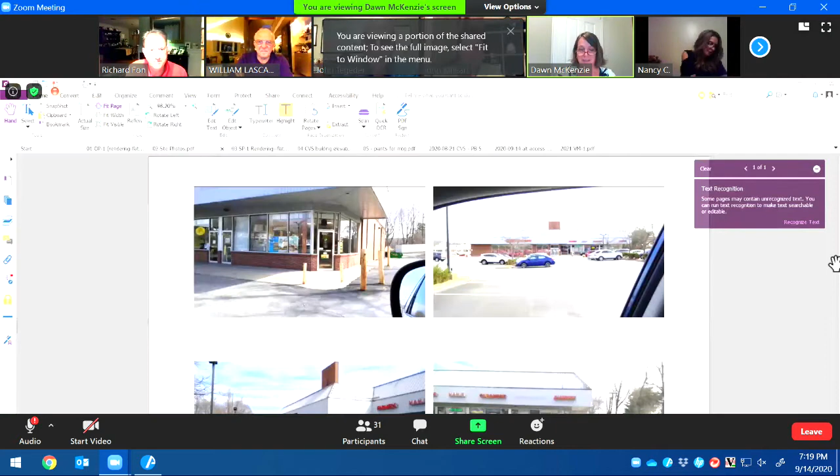CVS Plaza is in the C3 zone, it's 3 acres, located at 1990 Commerce Street. Commerce Street runs along the west side here, and this is the Triangle Plaza over here. The planning offices, the town building, is right next door in this spot.

We were here a couple of years ago with the PCSB Bank project, and we're back again. Vera Management, the owner, is looking to provide curbed plant beds along the front of the CVS building and the retail building on the east end of the plaza. This project has important benefits: it provides plantings where there are none now, and curbed islands with decorative bollards, which provide a much needed safety improvement along the front of the building.

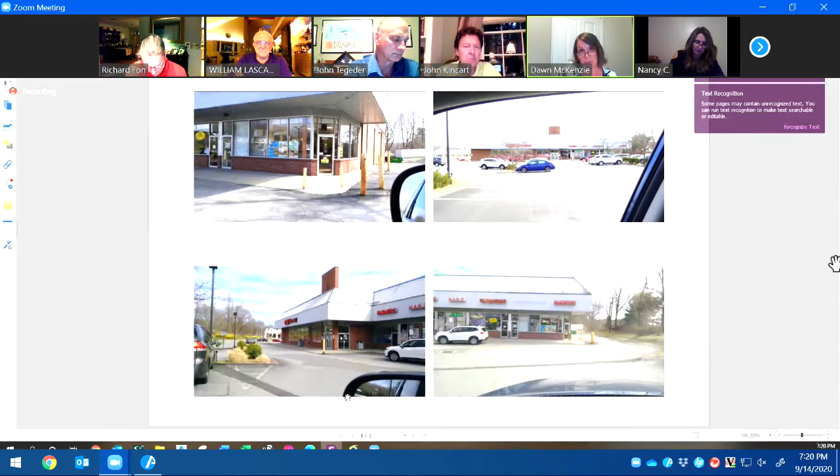Looking at the photos, this is the existing condition of the front of those buildings. Right now we have the parking lot, road pavement, and the sidewalk, with no curb in between, and it's that way along the front of the building. So they're looking to put something in to provide safety benefits.

Chuck DeMilo is here from Vera Management, the owner. He'll give you a little history of the project for those who aren't familiar with why we're doing this. Chuck?

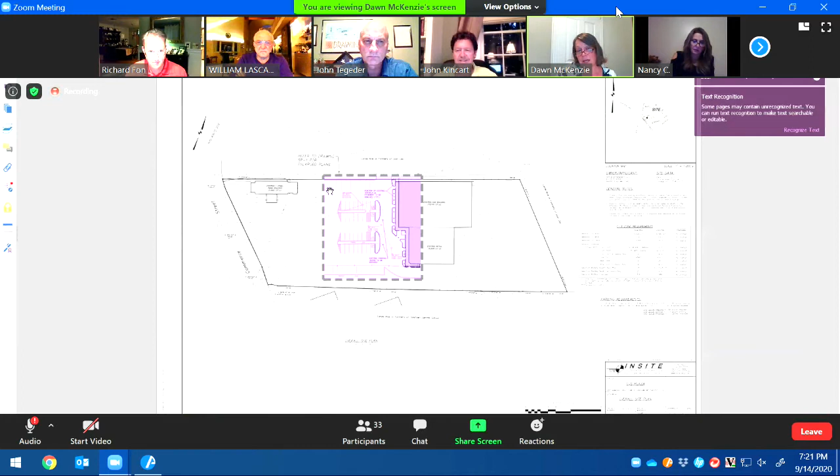In the past, there have been cars driving down. Let's go back to the overall plan. Typically the way circulation works is they'll come in off of Commerce Street, turn this way through the parking lot, make a right turn toward the building, then cut over to Triangle Plaza. That's how it works in both directions.

There have been vehicles that have come down the aisle and actually driven into the building. Inside, the CVS staff at the cash registers are standing with their backs to this wall. When Vera Management took back control of management of the property during the PCSB project, this was one of the things they were asked about, if something could be done. So that's the main reason we're doing this project.

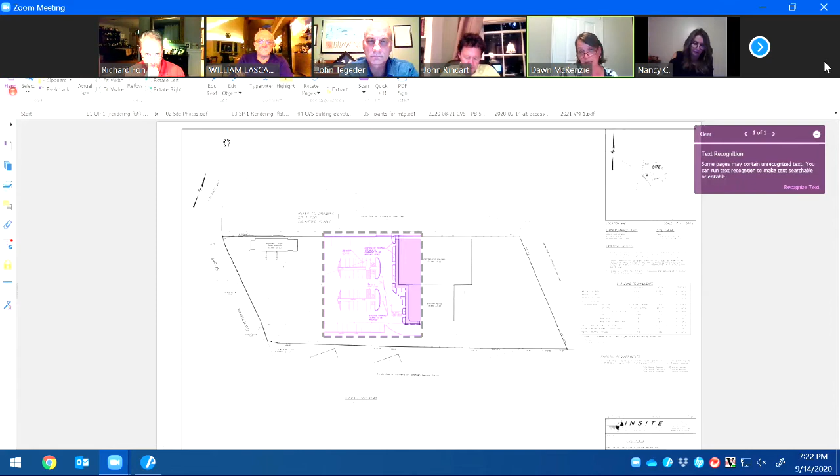In addition, they're planning on restriping and paving the parking lot as well, with the intention of getting that done this fall. So let's take a closer look at the project.

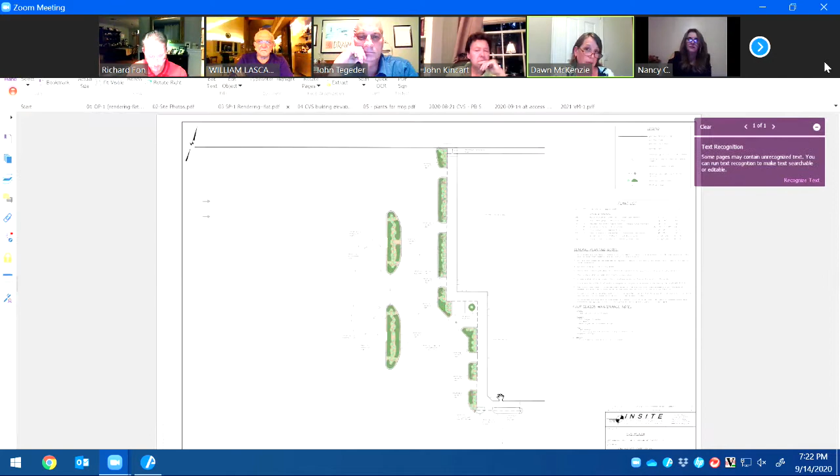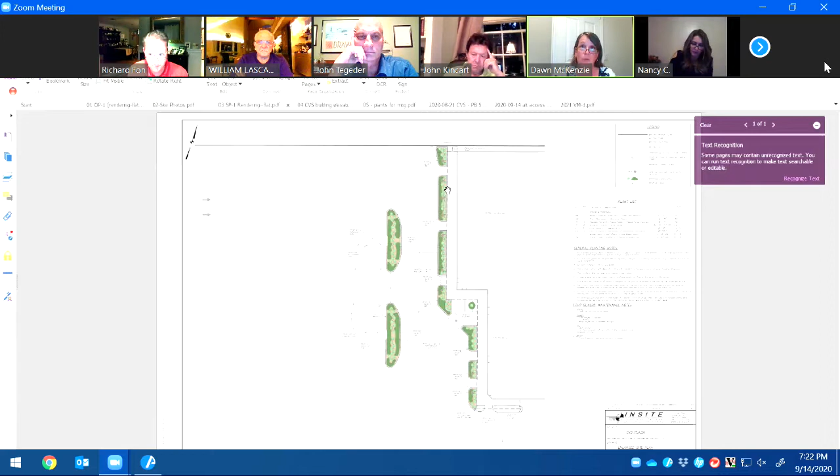Here we are at the east end of the plaza, the CVS and retail shop buildings. Our intention is to remove some of the concrete and asphalt pavement along the front of the building and put in curbed plant beds, with decorative bollards mixed in to provide additional protection.

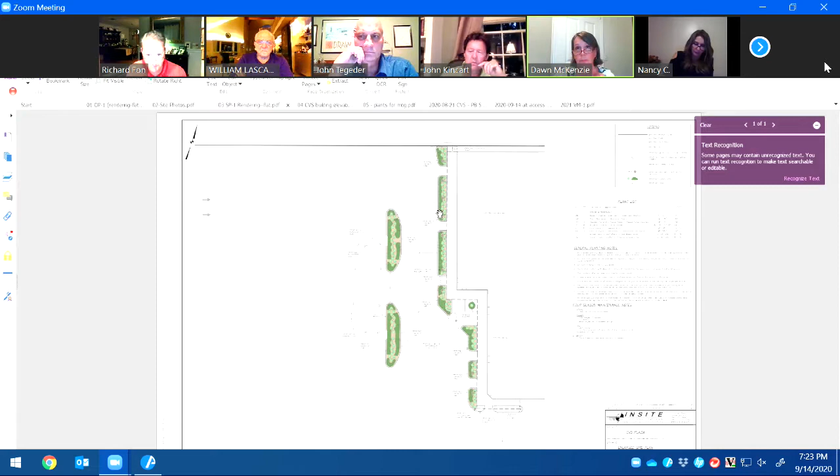Because we're taking pavement out in this location, we're also shifting the drive aisle over and making the islands at the ends of the beds larger, expanding and increasing them.

In the existing condition, if we flip back to this plan and zoom in a bit, you can see the dashed lines underneath in the purple area showing that right now there's just a half an island. We're shifting it over, making it bigger, and expanding it on the other side -- an additional traffic improvement for visitors in the plaza.

For this submission, at the request of the planning board, we provided some elevations of what the plant beds are going to look like in front of the building.

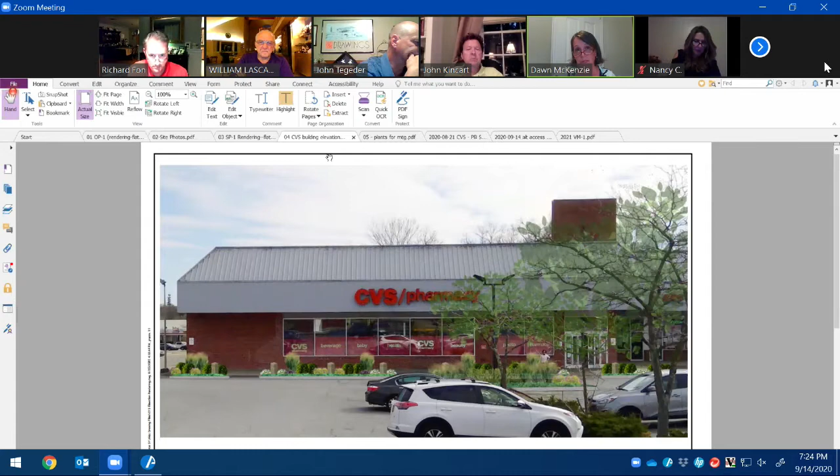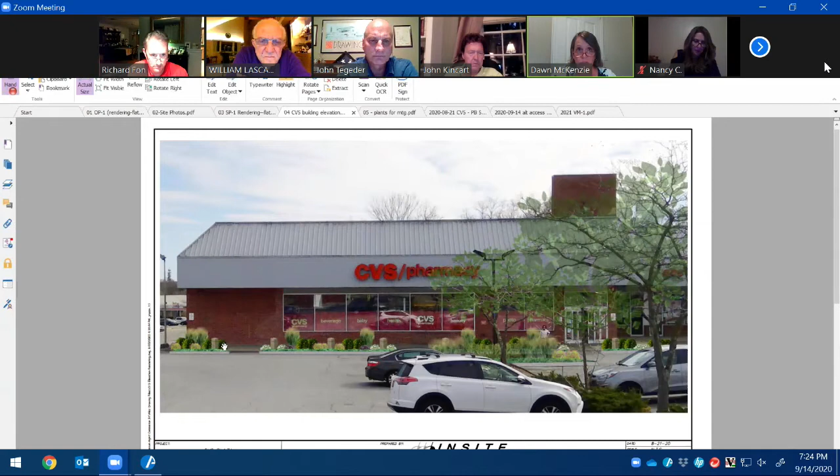You can see it's a 6-inch concrete curbed island along here. There are access pathways to the existing sidewalk under the roof overhang in front of the building. And we're providing, in addition to that, plantings and decorative concrete bollards in selected locations along the front of the building where we thought they would provide the most benefit.

The planting beds have been placed at the ends of the drive aisles because we thought that would be the location where they provide the most benefit, and the bollards are concentrated at the ends of the drive aisles as well. This is just in front of the CVS.

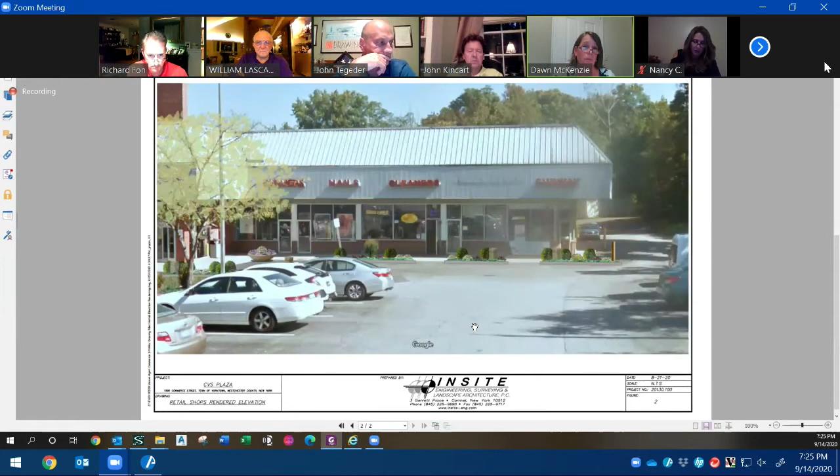We have another rendering, let's take a look at that. This is the other building. So there's islands and stone bollards along there as well, with plantings provided in front of the shops.

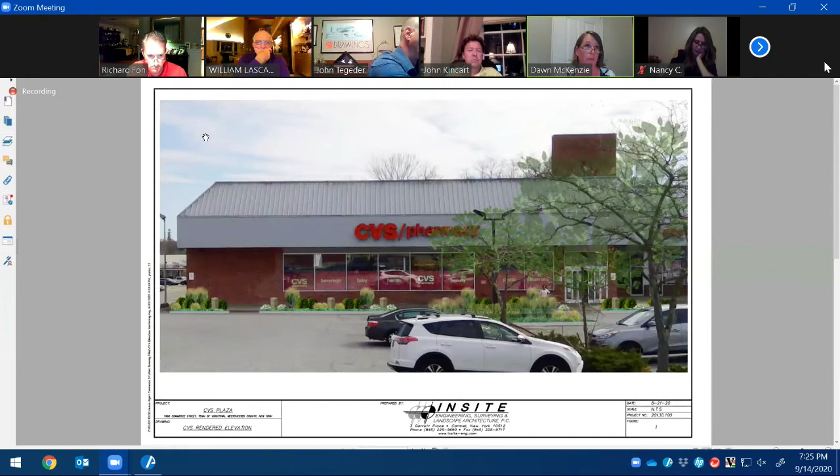When we met with the planning board at the last meeting, just to give you an idea of what we've been up to since we met with the board back on, I believe it was August 10th, the board had asked us to respace the bollards to get them closer together and to provide dimensions so they could see how far apart the bollards were placed. So what we've done, if we zoom in...

The board had asked us to space them at 6 feet on center. If we did that, that would require us to install twice as many bollards, and really that was an aesthetic that the owner was not looking to provide.

One of the first layouts that he had gotten for this project was a soldiered row of bollards along the front of the building, and it really was not very attractive. We're trying to do something that will provide benefit, safety improvements, and something that was aesthetic and actually looked better than what's there now.

And of course the plantings accomplished looking better, and the bollards we've selected for the project actually look much better than what's there now. But we feel that the improvements we're providing really provide much more safety benefit than what's there now, between the curbs, the plantings, and the bollards.

So what we've done is we've spaced the bollards closer together. We have focused them on the ends of the drive aisles, in these locations, with the spacing that we've provided. So center to center, which doesn't mean a lot, the bollards are 13 feet apart.

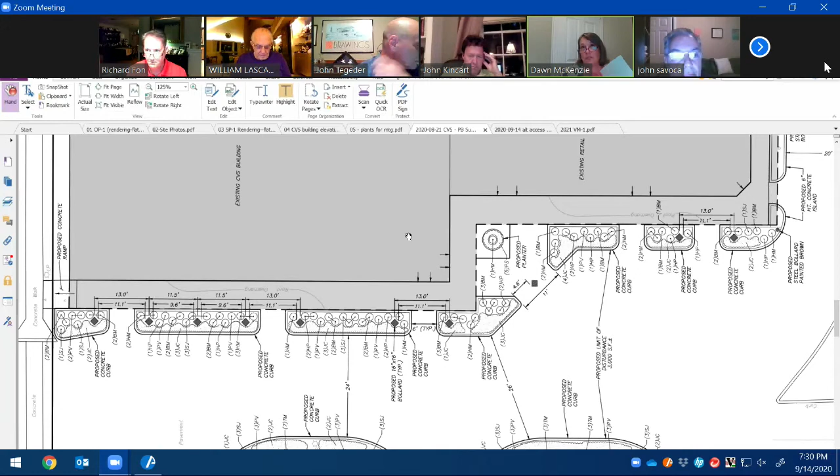Let me just bring that up. It's the sketch right here. So this is the location right here. The entrance to CVS is here, and there are some windows here. And then between these windows and the next set of windows, there's the fire department connection on the front of the building. So what we are suggesting is we'll shift one of the access aisles.

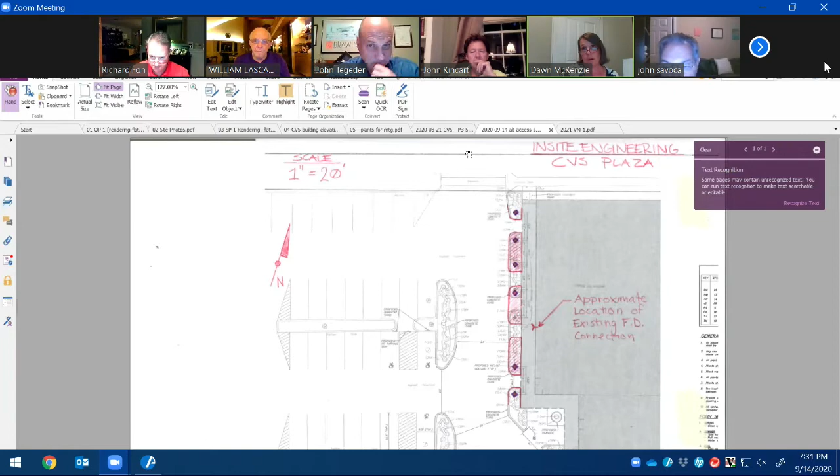Actually, it would end up providing an additional access aisle in that location and just modify the beds slightly. So we end up with the bollards in the same locations as proposed on the plan we previously submitted, but it would provide the requested direct access to the fire connection for the fire department.

He also recommends striping for a fire lane, which I'm sure was there previously, and we can do that. We just need to verify with him the width, and I wasn't able to speak with him today regarding that. The other thing he recommended was fire lane no-parking signs within the plant beds, and we can do that. We'll just need to verify the spacing and get those on the plan.

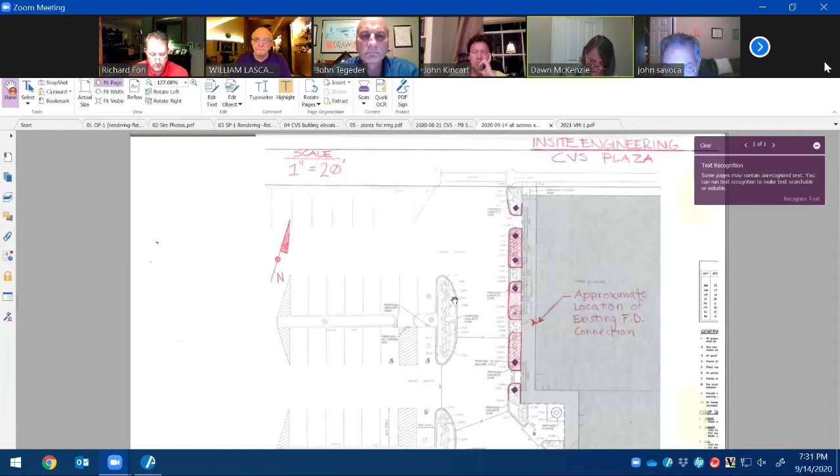And I think that goes through all of the things we've done, and I think it gives a general overview of the project.

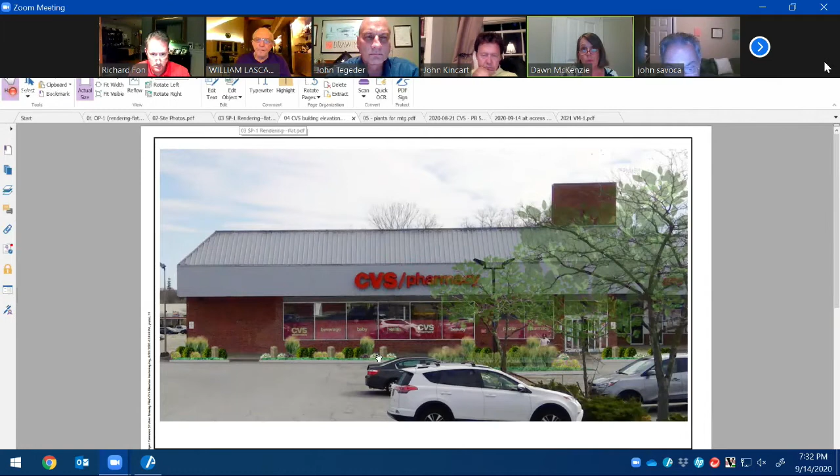One question on the town engineer's comments - there was a question about the handicap spots. Yes, we can. So if you look at the plan, we can provide another handicap space right here. It just requires markings and additional signage. We already have an access aisle, so we'll address that as well.

Okay, and this isn't impacting the parking requirements, right? No, it's not. We're only required to have 88 parking spaces, and we have 107, so we have more than enough parking to accommodate another handicap space.

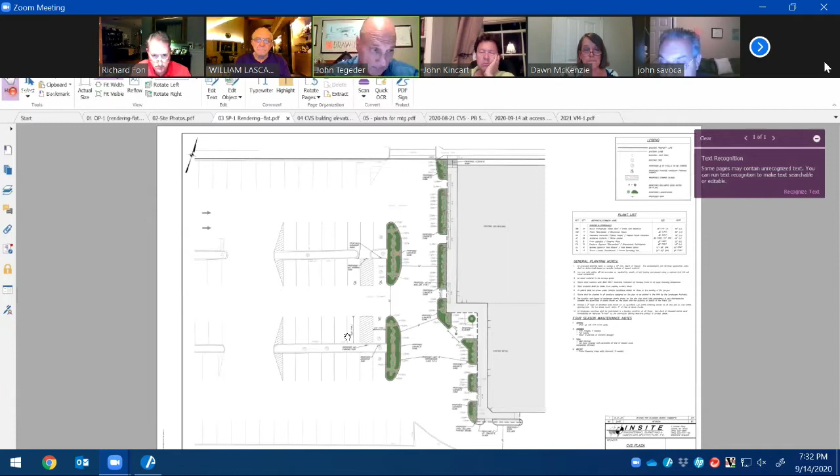But Dawn, could you go over the parking in a little more detail? You're eliminating 4 spaces, is that right? We are - so let's see, let's go back to this plan. Actually, that's an old version. We're not eliminating parking spaces.

Most of the spaces are larger than required by code, so we're actually able to restripe with code-conformant spaces, because what's there is bigger than needed, and not lose any spaces. So what you're saying is that this plan shows you're eliminating 4 spaces, but by virtue of the restriping, you're actually providing 1 more than exists at the site today - is that correct?

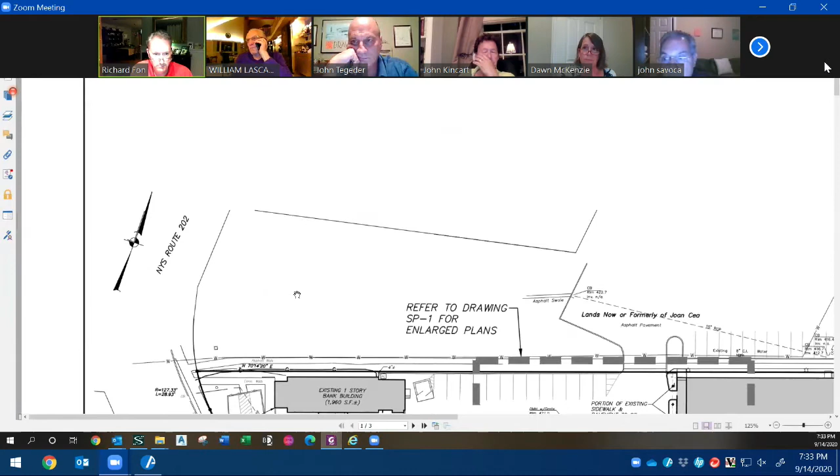Let's just go - sorry, this highlighted plan is an older version, and we confirmed the parking counts, which I have here. So yes, we're actually picking up a space. That sounds odd, but that's what I'm being told.

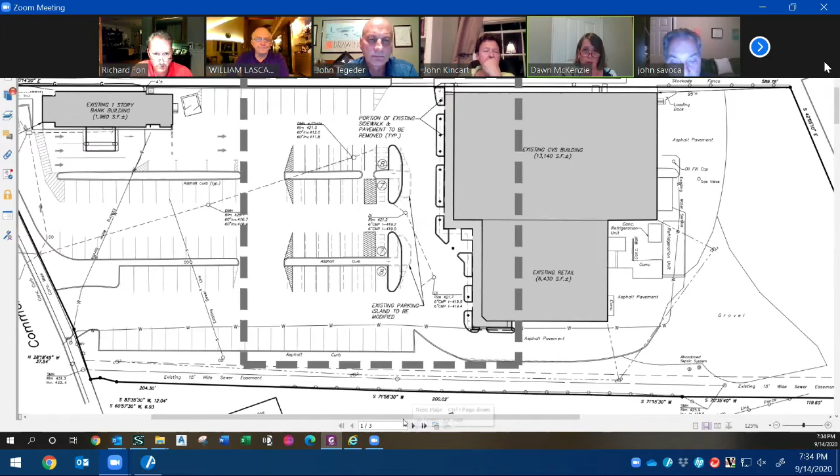Just out of curiosity, what are you going to in your space size in that area? They didn't dimension those - let's see if it's on the other plan, hold on. 8.5 by 18.5. Got it, okay, thank you.

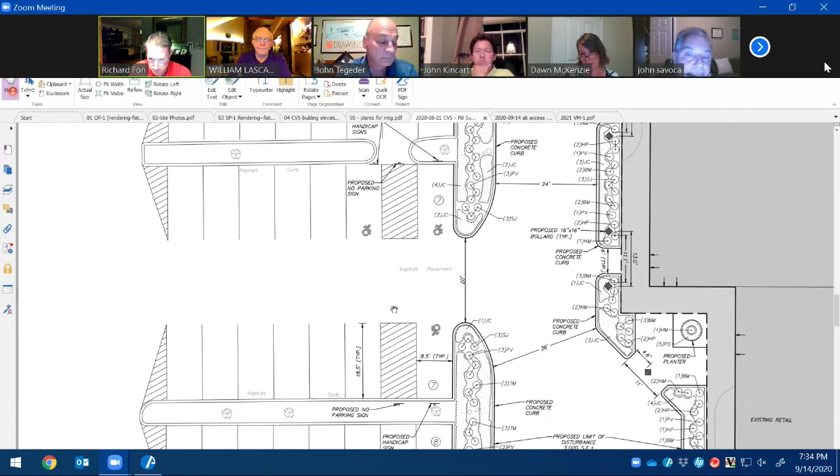Okay, that's it, Dawn? Yes. Any members of the board have any issues? Well, I'm going to reiterate what Bill said last time - I think the spacing of the bollards is something that needs to be taken into consideration.

I understand that the proposed plan is far superior to the existing site conditions. I was there for one of the incidents with CVS, and it was horrible. They came down the traffic aisle through the building, and it was quite an event. Thankfully, nobody got seriously hurt, to my knowledge anyway.

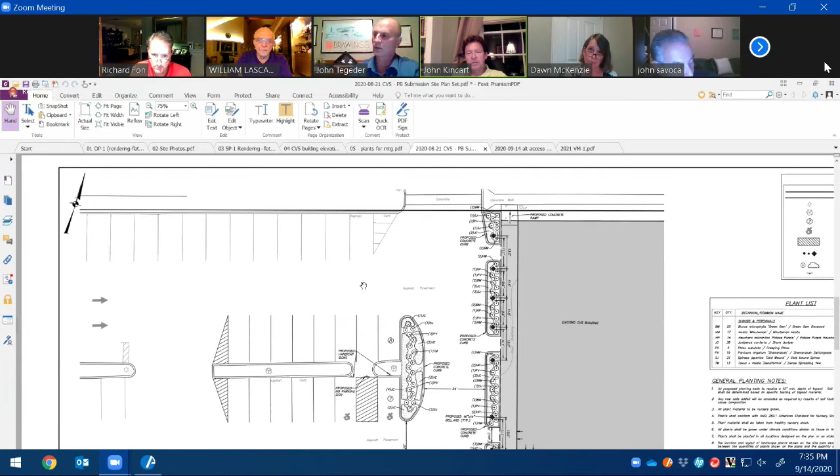I see the building, and the north end is where the vehicle came down the hill behind the now PCSB building. That's fairly heavily fortified, which is great. We're not just talking about traffic patterns, and that's the point I'm making - if people can come down the hill and hit the building because of the very busy intersection, perhaps the busiest one in town, then that end of the building should be protected, and it appears to be fairly well protected. I'd like to see another bollard.

The fire inspector's comment is going to throw a wrench in that, but that long space along the front of the building that was quite a bit larger, as people try to maneuver that turn, they could easily get a car in between those bollards. But the biggest concern might possibly be the southeastern section of the building where Subway is and some of the other tenants there—it's relatively unprotected. Somebody coming in down that traffic aisle and trying to maneuver a turn to the left, if somehow they lose control of the car, that whole corner only has a single bollard right in front of the corner. There's a lot of space for a vehicle to get through there.

I would like it to be revisited. If you're going to do it, I think you should do it right. Even if it's putting a railing in between the bollards to create a fence-like look that we've often seen, it could be an iron rail in between the concrete. It could be iron or some type of steel in between steel bollards, but something that would be a little more protection than what's being proposed.

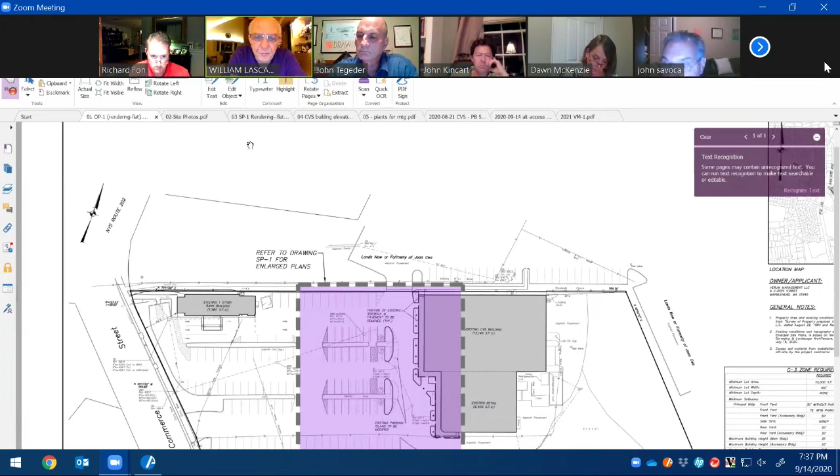Well, I absolutely agree. A juniper is not going to stop a car. You can get a Sherman tank through those bollards. And that's where it'll go unless you have a target on the bollard and they want to hit the target—that's a different story.

Yeah, but look at the angle—the bollards are protecting the ends of the traveled portions of that parking lot. And this corner is really not head-on to any other section except the road that's right in front of it. I think that's a vast improvement over what used to be there, which I think is nothing.

The corner itself is kind of protected, but I think that was basically done originally for the truck traffic that has to get behind the building and maneuver that turn possibly. But somewhere in there, I think it might be a good idea. I don't want to offend anybody's creative plan here, but safety-wise, if it could be revisited, I would, on behalf of the public, appreciate taking another look at it. I commend the applicant for taking control of this situation.

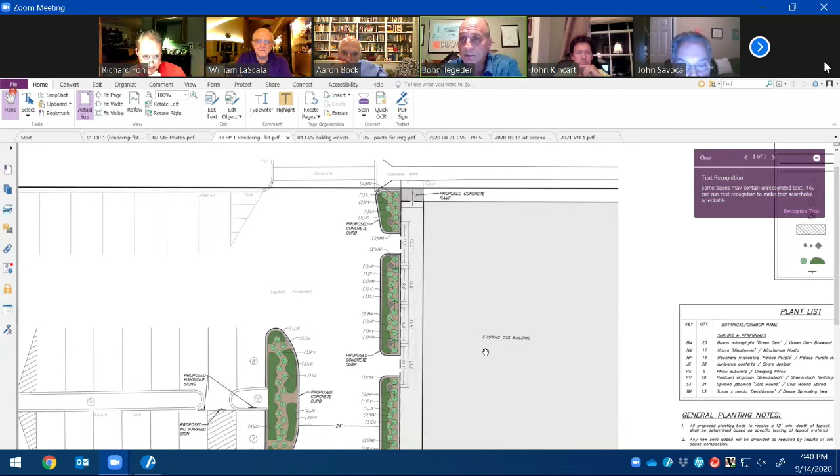So when I looked at the renderings, I think they're very attractive, and I actually think that the bollards mixed in with the plantings there—if there were another 2 in that section where the 3 are, I don't see any aesthetic or any diminishment in the aesthetics that you're creating whatsoever. They are decorative bollards, as I understand it. I haven't seen the detail or the catalog cut on them, but I wouldn't see any aesthetic difference. And if you added 2 or 1 or 2 even on the south side, I think you would increase the safety to a very much higher degree, actually. So, absolutely, that's my sense.

Of course. Dawn, can you go back to the plan view, please?

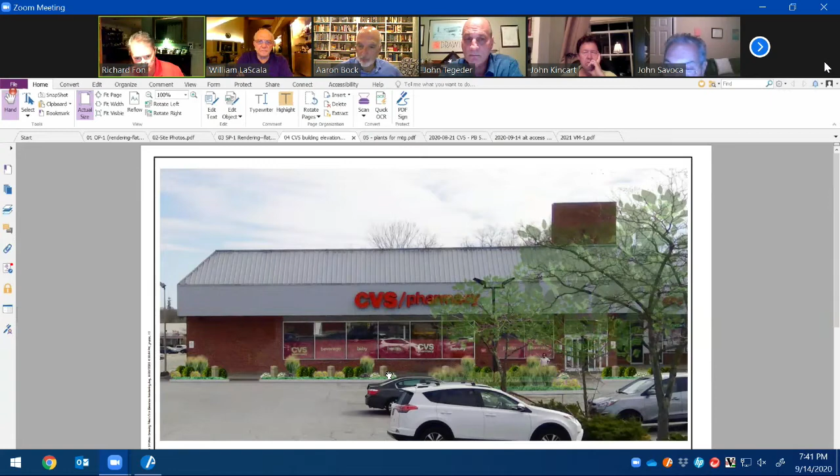This one, or the site plan. Yeah, that's fine there. I mean, if the whole lot's getting restriped and we're redoing the whole area, would it be beneficial at all to have that center aisle there—

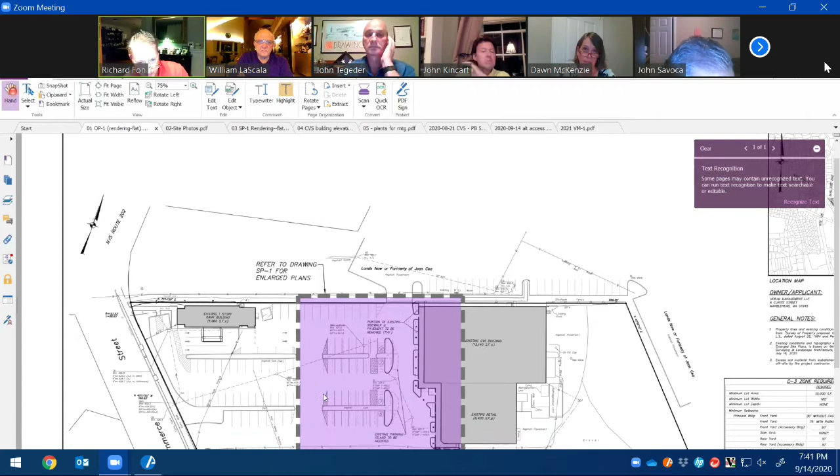angled parking so that it's one way, traveling away from the building, so that people aren't going to drive towards the building, at least with that center aisle.

That might give... and I agree with John Kincart. I'd rather see the larger spots, especially if you have enough parking.

But what about, is there any way to use... if the owner doesn't want to see bollards, maybe you could get boulders and anchor them somehow so they'd become protection. I don't know how you'd engineer that, but I do agree with John Kincart and his comments.

There's a problem there, and we appreciate everything you're doing trying to make it better, but is it enough? Any other thoughts from the board?

Just one other thing I have—I know I touched on it last time, but I don't think you're doing, Dawn, you may have to refresh my memory. I apologize—you're not having a curb at the individual entrances to the sidewalk?

So you're talking about... let me get my mouse. You're talking about these locations? Correct, so no curb there, right? So you're maintaining the existing concrete sidewalk as is?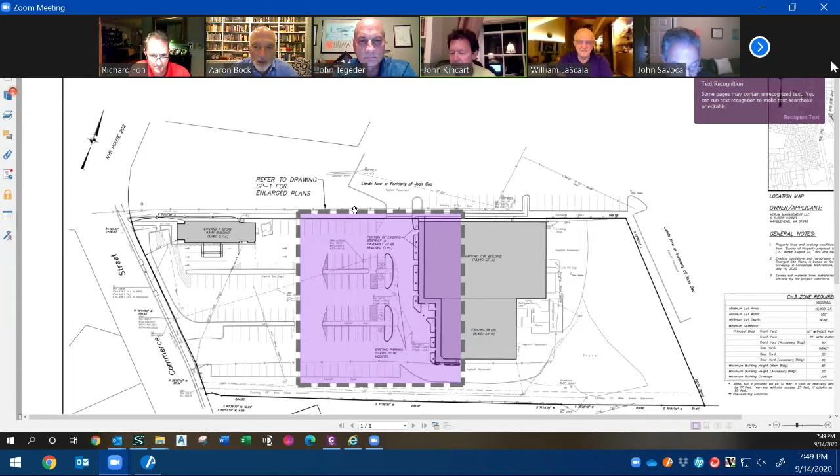If the applicant would consider what we've suggested in terms of additional bollards and maybe keeping the spacing of those, the dimensions of those parking spaces on the wider side at the very least to afford a tiny bit more maneuverability but visibility, I think the board, from a couple of comments that were made, would appreciate efforts in that regard. I don't see the dimensions of the parking spaces holding anything up.

And because we didn't get any public comment, I would recommend that the board close the public hearing and leave it open for written comment for the usual 10-day or 14-day period. If something comes up, we can revisit it at another meeting, but at least because we're only having one meeting this month and we are heading into fall, we'll be in the fall season calendar-wise by the time we meet again. I would like to see the process move along because it is going to be a benefit safety-wise to the public. Yeah, I would agree with that.

I second. John, before we move on, can we work some of these other issues out, stormwater and such, in work session? Well, I guess I would ask John, what are you proposing, that you close the public hearing, leave it open, and then come back to the next meeting and do your decision statement? Is that your sense? That would be my recommendation. Okay.

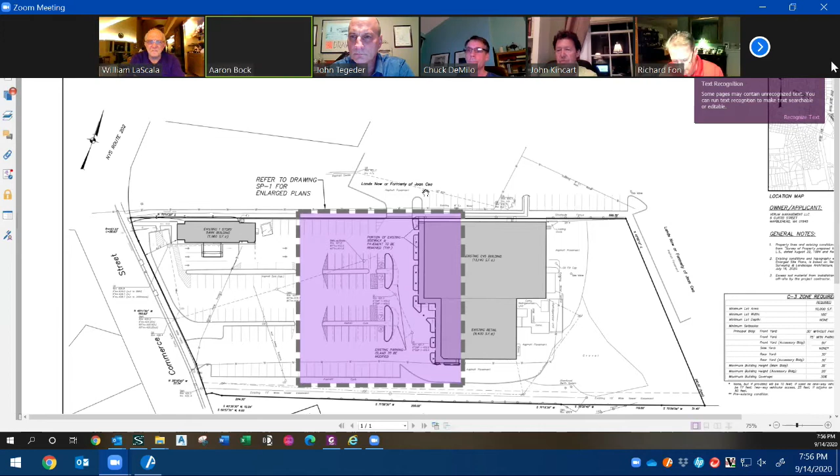Mr. DeMilo, would that be helpful to get a conditional approval sooner than later so you could start that work? At least we know the location of the curbed planting beds. I don't think anybody brought up any comment about relocating or changing the dimensions of those curbed areas, to my knowledge. Well, that helps.

If the program is delayed for a month, we probably are going to miss the window for this fall. If we don't move forward soon, I'm pretty sure this is going to need to be delayed until spring. Yeah, they need to be reconfigured according to the fire lane, so they'll need to be drawn differently and redimensioned.

So, okay, but again, that can be a condition. I think that's fine. John Tegeder, do you have a concern about issuing a neg deck and a site plan approval with the SWEP issues still outstanding?

No, I don't. The reason is because this is a previously developed site with a stormwater regime already in place, which is being altered in a way that is not expanding the impervious surface. It's actually lessening it. So I think the stormwater regime here will still work properly. Otherwise, I think the commentary from the town engineers would have been much more substantial. I still want to find out from him, but I don't think that even if there are some modifications it rises to the level of needing a positive declaration on this project.

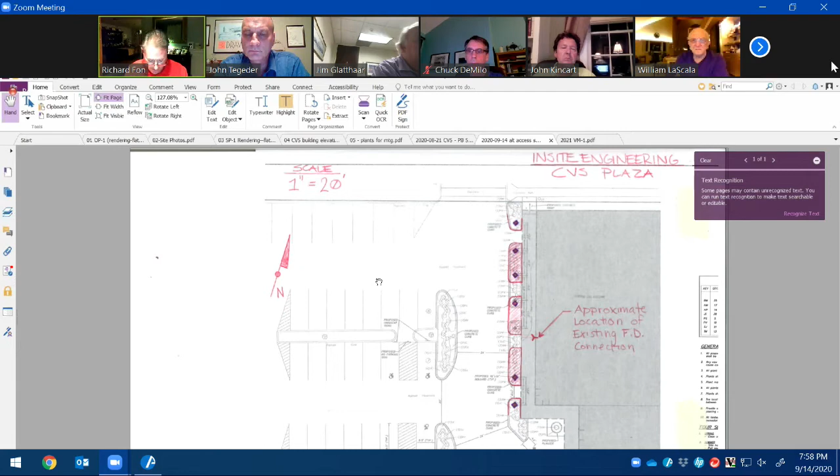So between now and the next meeting, Dawn, I think it's important that you meet with John, the town engineer, and possibly the fire inspector at the same time so that we can get that moving. It sounds like the consensus of the board now is this is a safety improvement. They're not gaining anything out of this other than the safety of the occupants and the people there, which I think is important. John Kincart brought up a good point that before we know it, winter will be upon us.

So we do have a neg deck in front of us, and we also have, let's pull it up, a resolution.

So first we'll deal with the neg deck, dated September 14th, 2020. Do I have a motion to approve the neg deck? So moved. Second. You didn't declare lead agency.

Do I have a motion to declare the town as lead agency? So moved. Second. All those in favor? Aye. All right, then we have the neg deck again, dated September 14th, 2020.

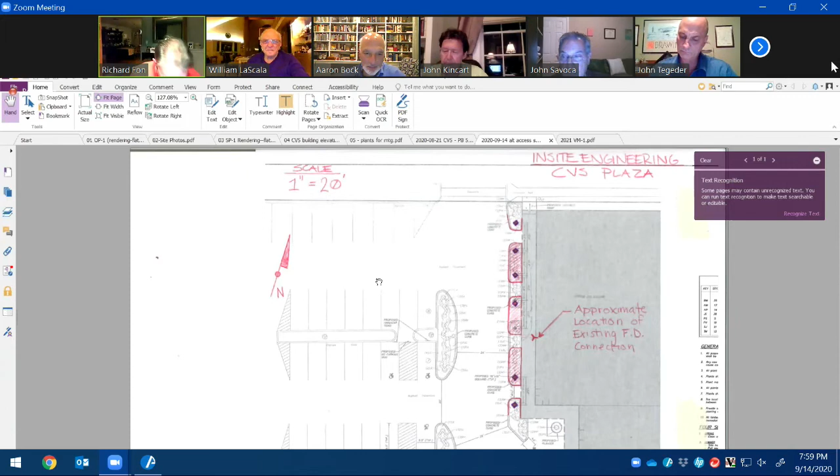Do I have a motion? Motion. Second. All those in favor? Aye. All right, then we have a resolution approving the amended parking plan for the CVS Plaza.

The notes to be included have to do with correction of the lighting, the fire inspector's issues with the fire lane, the location and design of the bollards, the parking spot alignment and size, DEP clearance, and the possible stormwater permits.

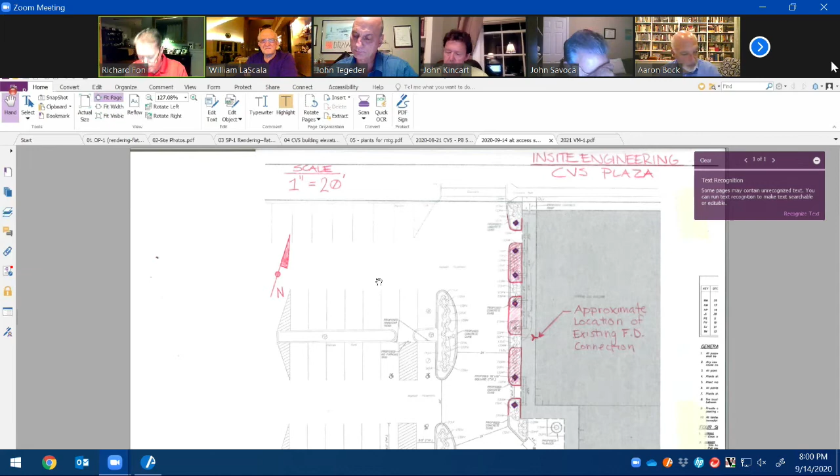Other than those noted, are we missing any, John? Landscape and bollards on there, the planting specifications. Okay, as per box, so the landscape plan. Jim, we missing anything? Nothing that I can think of.

All right, so with the comments noted, do I have a motion for the proposed resolution? Move. So moved. Second. All in favor? Aye. Aye.

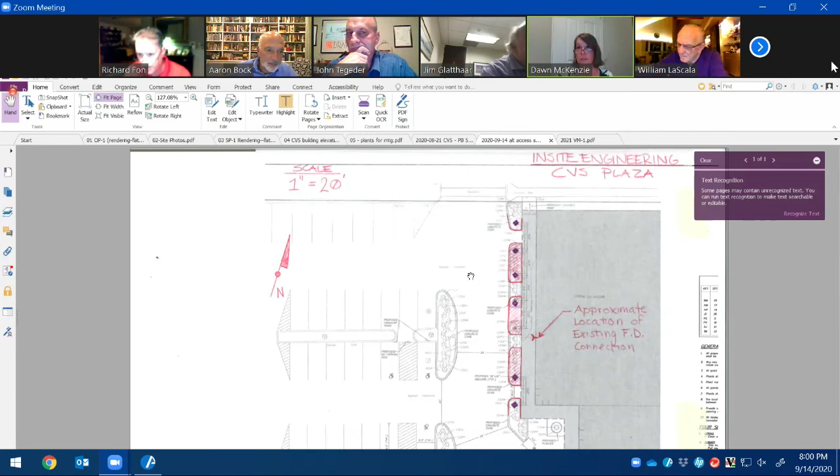Thank you. Thank you very much. Well, Mr. DeMilo, thank you for working with us and improving your place. Yeah, thank you. Thank you for your time. Thank you for your consideration. Great, thank you for working with the town. Good luck, Dawn. Thank you. Thank you very much. Don't worry, we'll get it done. Great.

Okay, is Joe on? Can you hear me? No, we can hear you, but it's got to be louder. Oh, I heard him. Yeah, I heard him say can you hear me. Can you hear me? I heard him too. Yeah, we can hear you. Okay, I'm going to step out.

All right, John. I'm recusing myself on this application. Good luck. All right, just for the public, we are back with number 5, the Sandvoss Minor Subdivision. This is a decision statement, located at 1005 Hanover Street.

Joe, you're on. Hello, everyone, nice to see everyone. So we're before you asking for a resolution of approval for the Sandvoss subdivision, which is a 3-lot subdivision. It involves 4 lots because one of the existing lots will have an access easement for the 3 lots to the rear of the property. So really it's a 3-lot subdivision and it's a minor subdivision.

This project has gone through extensive scrutiny. It's had 2 public hearings. It has approval from the DEP, the DEC, the Army Corps. The town engineer has given his conditional approval, and the health department approval also. We are asking to move this forward and get a resolution of approval so we can get the map filed and this project underway.

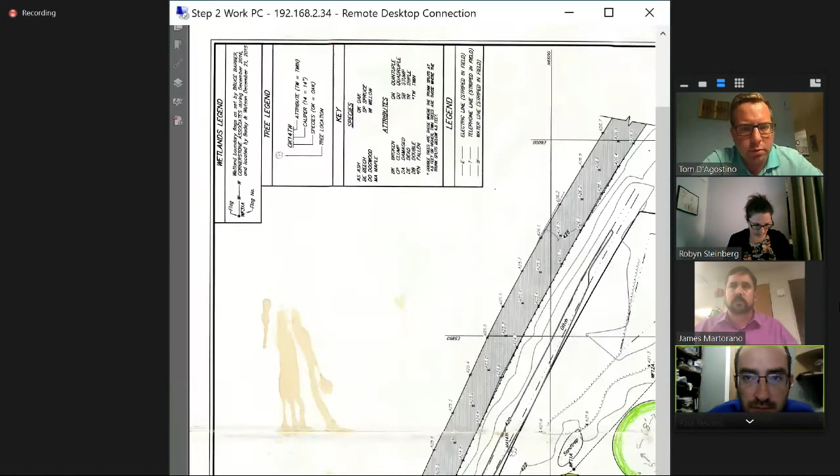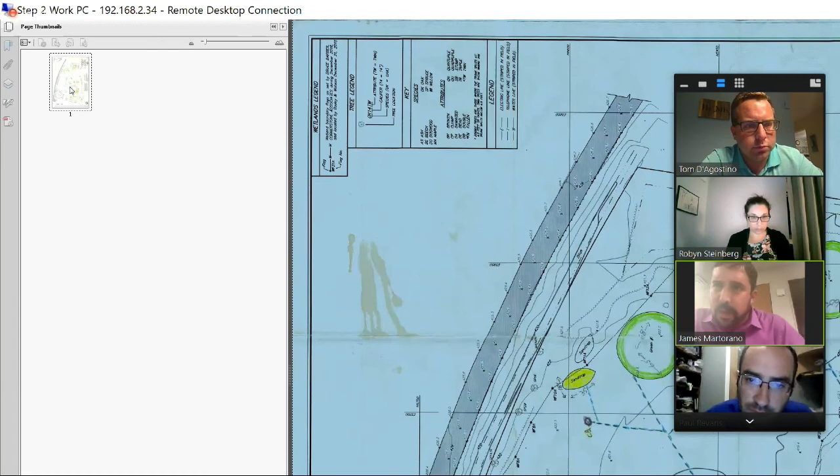That's very interesting. So in green are the greens, and red, I believe, are the tee boxes. And I believe there's appropriate drainage, which was added to the SWIP on those greens as well.

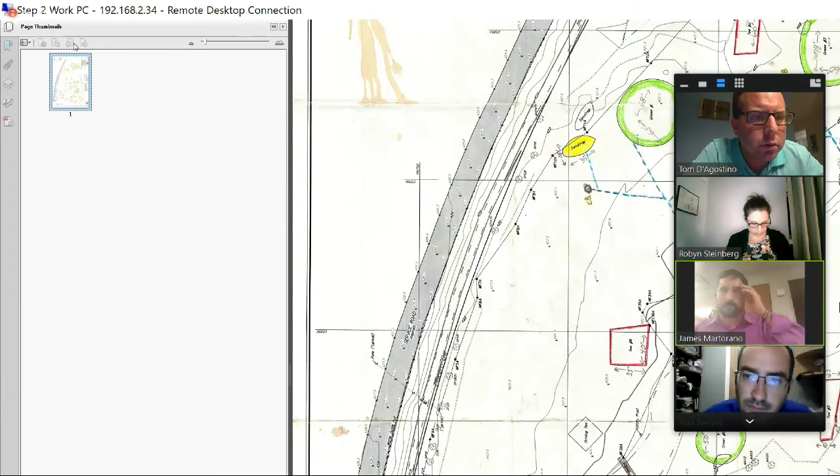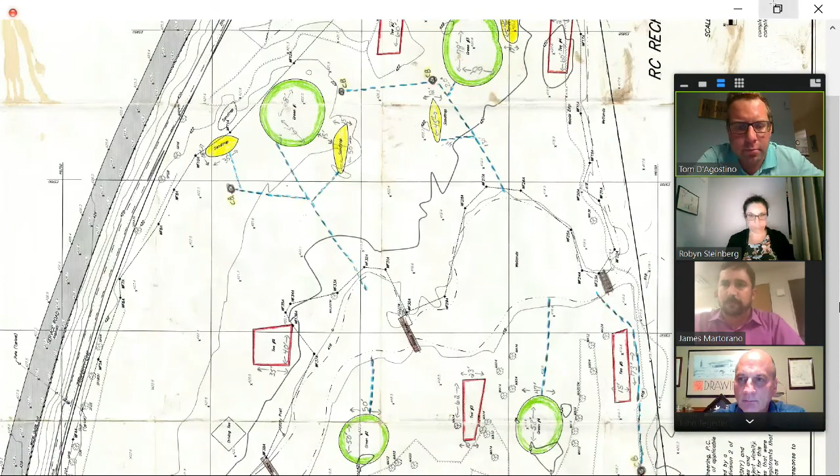That's what you're working on now, the greens and the tees. Is that right? Yes, the 2 tee, the 3 green, the 4 tee, and the 9 green.

Okay, and the entire project also has some work to the fairways, is that right? In terms of some tree removal, is that correct? That is correct. There's a number of dead trees along the way there that could be hazardous.

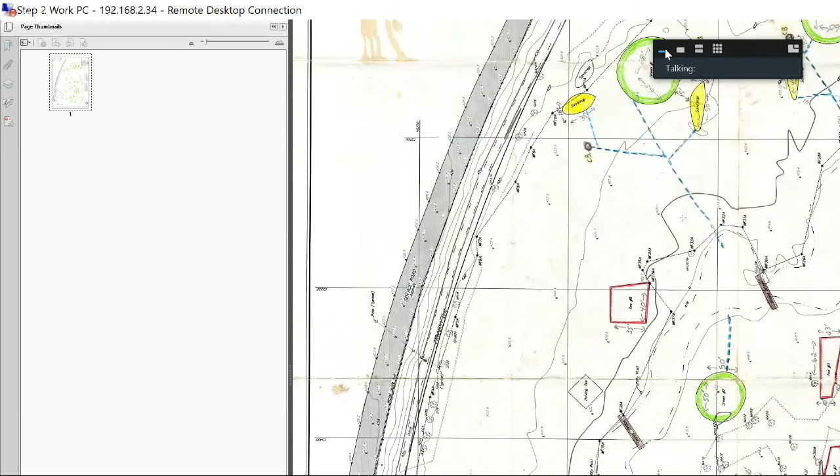Okay, were all the trees that were removed dead trees? We have not removed them yet. You have not, but some trees were removed here before. Before my time, yes. Was it before your time, Paul? Yes, I've only been involved here since about February.

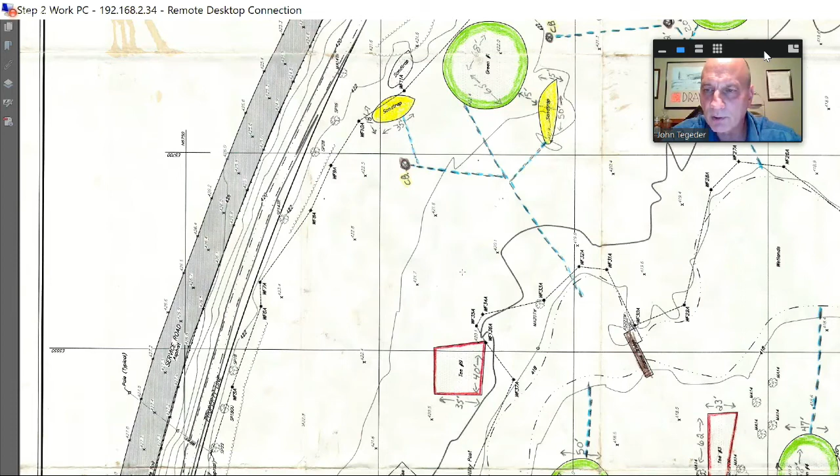Paul helped submit the NOI and SWPPP. Okay, and so the trees that remain to be taken down, you'll have an inventory of them, I expect, at some point? Or do you already? Absolutely, yes, and we took some photos of them as well. Okay, do you need me to send that to you, or Paul to send that to you?

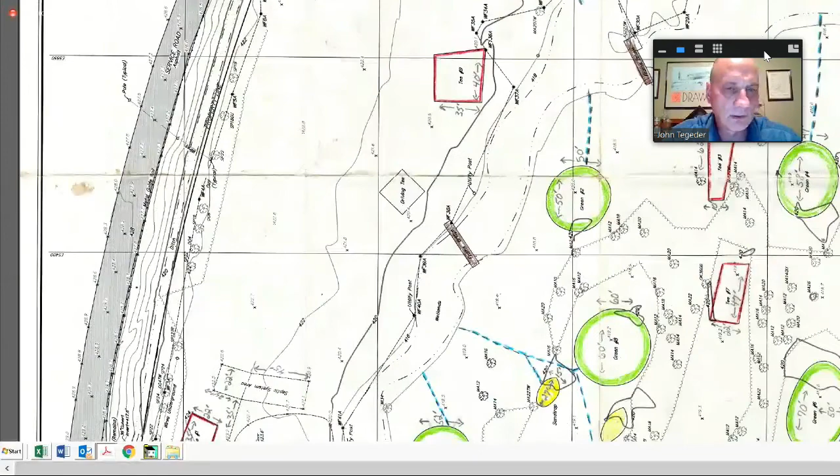Yes, the dead trees that need to come down? Yes, I'd appreciate that. No problem. They can be identified from the ones that are already on the plan, right, Jim?

Correct. And in this process, they're putting in over 40 trees into this plan. Obviously, you need the buffer between holes. Yeah, you should also get an estimate at the very least of the number of trees that came down prior to both of you guys' involvement.

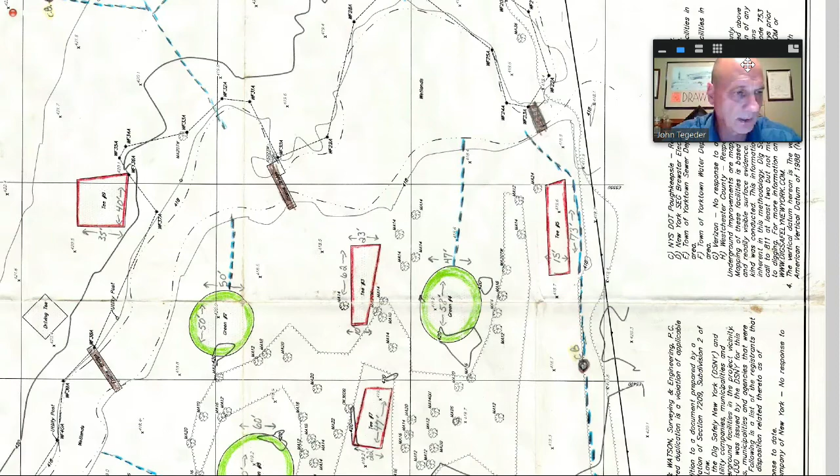John, there is a tree memo from a couple of years ago which talks about 90 trees coming down. Okay, good, so they can use that as the number that you're looking at, plus what they will take down. Robyn, do you have that tree memo by any chance? Any way someone could forward that to me?

Yeah, it came into my materials from the department, so planning has it. It's from September of 2018. I would love to put that in my notes.

Okay, I thought you were making a links style course when I saw some of that work being done. So in the SWPPP that we submitted, we stated that approximately 150 additional trees and shrubs will be planted throughout the property.

John, has this been referred out to the various departments or the boards? Tom? You're on mute, Tom. You're muted.

It was referred out. Yes, the latest plan has been referred out. Everybody? Yes, I can speak for all in-town agencies, in-house agencies.